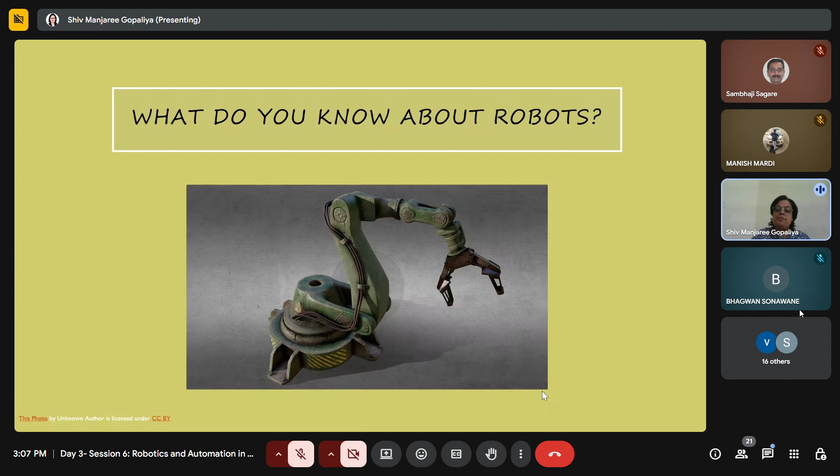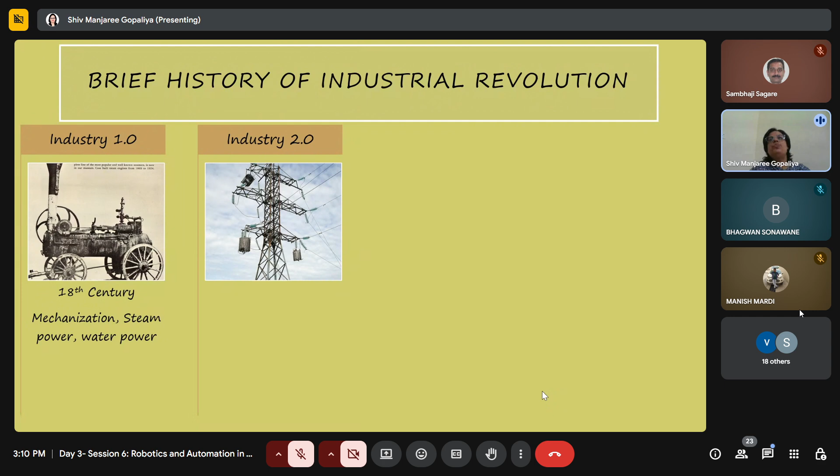And then Industry 2.0 happened, in the 19th century. It saw electricity generation, mass production. For the first time, factories were doing mass production. Textile industry was huge. Then we had the assembly lines also, and everything came up in the 19th century itself.

Industry 3.0 came up in the 20th century, where there were a lot of advancements in ICTs, electronics. Automation started in the 20th century itself, networking, networked production.

And here, before I proceed, I would like to say this, that it was early, somewhere in 1865, where for the first time Massachusetts Institute of Technology, the MIT that we say in present times, came into existence. Okay, and only 15 students were there, with 5 students per stream, and only core 3 streams were there in engineering: civil engineering, electrical engineering, and mechanical engineering.

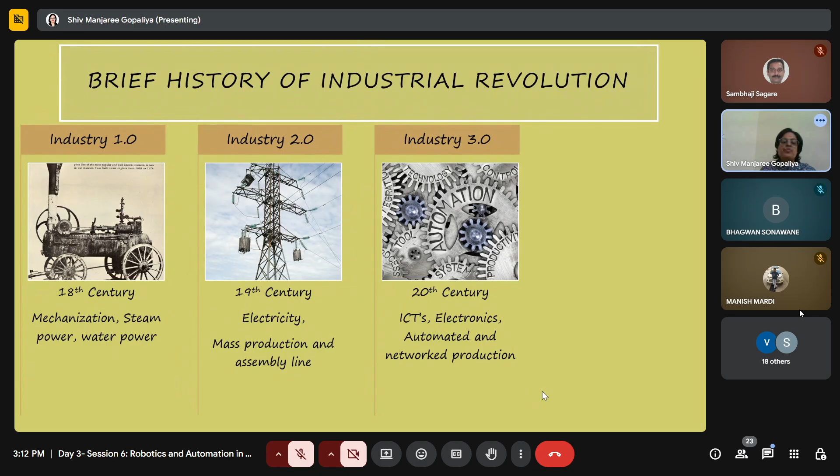So yes, and this is how everything started, right? 18th century, but in the 20th century we went on for automation and electronics and networking and everything, and then came Industry 4.0, that is today.

And what we are seeing today is, we have robotics, advanced robotics, 3D printing, that is additive manufacturing. Today morning you had a session in additive manufacturing also, I was going through the schedule. And then we have Internet of Things. Artificial intelligence is so huge these days. We have the big data. So all these form the Industry 4.0.

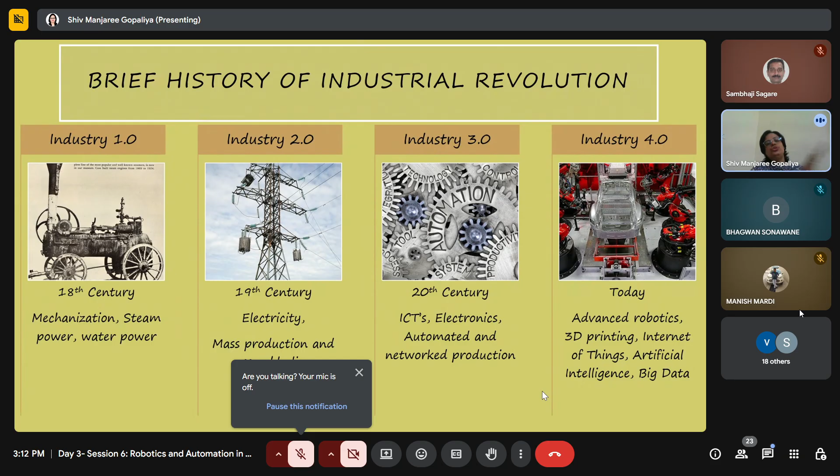But when I walk through this brief history of the Industrial Revolution, there is this pertinent question, what is Industry 4.0? It is the current trend of automation. Everything is like automation, whether we are having smart factories or smart homes or anything, it is automation. And when we say automation, the crucial fact is how we are using the latest technologies. So we need the technologies to be up to date, like cyber physical systems, Internet of Things, cloud computing, cognitive computing, everything.

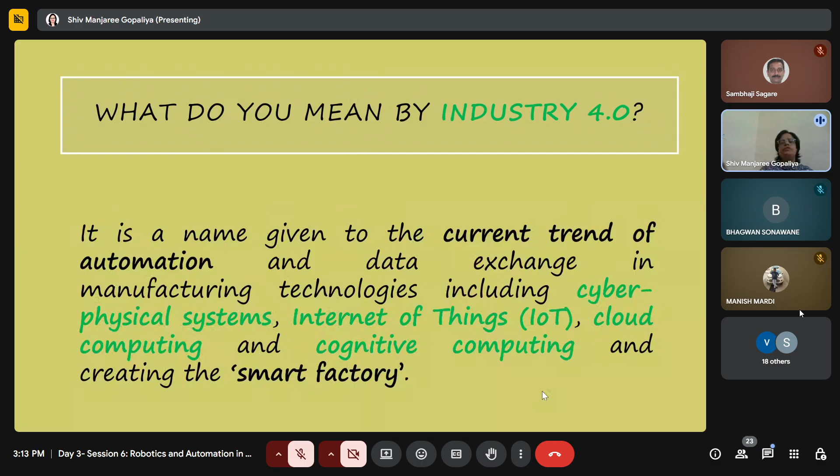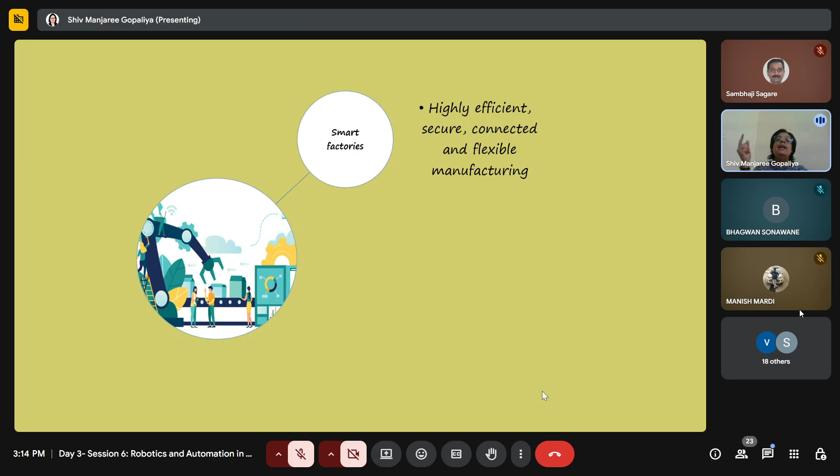And whatever we are trying to do, we are actually making a very robust, laborious factory into a smart factory just with the help of these technologies, and everything makes the Industry 4.0. Now Industry 4.0 has given us smart factories that are highly efficient, secure, connected. We get flexible manufacturing. We know in the present times what is the competition in the market. To survive in the market, the lead time should be so less, and everything comes up with flexibility when we talk about it in manufacturing senses.

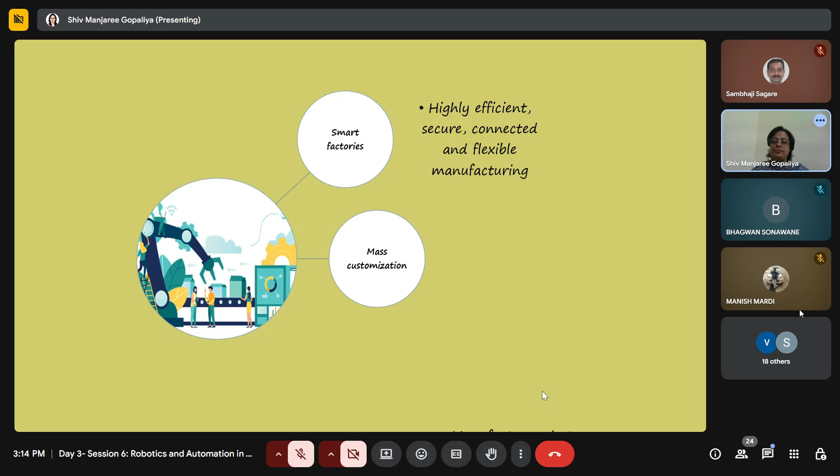Then mass customization, this is crucial - manufacture what the customer wants with low incurred cost. Okay, so low incurred cost.

And one thing more, in the least available time, you have to give it to the customers. And then definitely the technology. Industry 4.0 is made up of technology. When I say technology, it means interactive tools for customized products. And it is applicable not only for software but for hardware as well, and somewhere the hardware and software must work in unity, and only then it will help humankind. So this is very crucial.

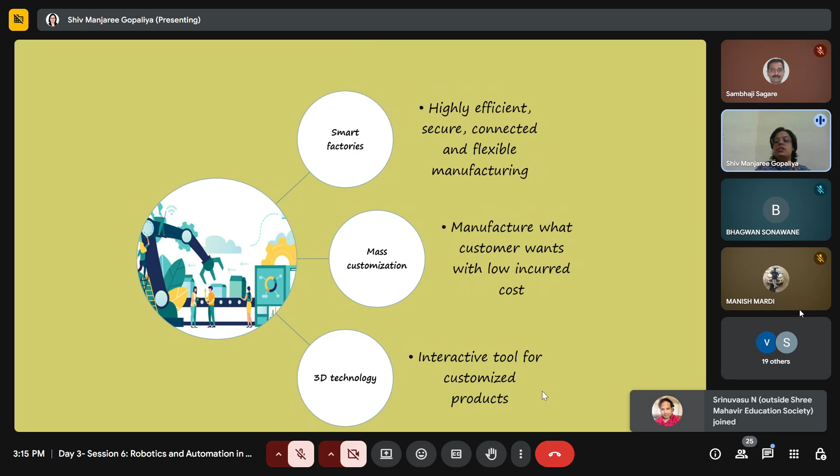Now, if I look into my last two slides, there is this question: what is common in industrial revolution? What is the common factor? If I look into the industrial revolution starting from Industry 3.0, Industry 4.0, and here I have taken the liberty to add one more term, that is Industry 5.0. I will be talking about this term a little later in the slides to come.

So if I see what is common in these industrial revolutions, the answer to me is a robot. Definitely it's a robot, from 3.0 itself, where automation started. Semi automation, automation - that level, that progress, we have actually started going towards the robots itself. And definitely we have the best robots like Sophia, the best humanoid robots present in the present times. So I hope you will agree that the common factor in the industrial revolution is a robot itself.

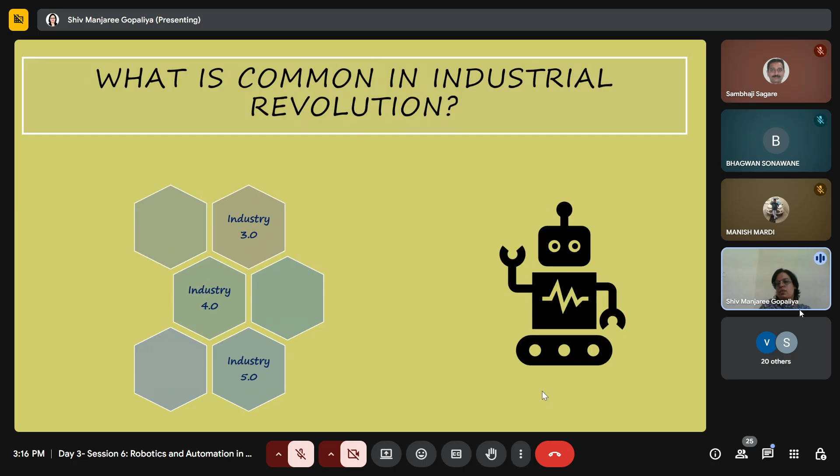Well, this is a separate task - how many of us, or how much of the younger generation is studying or learning about robotics, and how much they know how to work on the most advanced machine. That is a secondary question to answer, which will also come in my presentation in the slides to come. But this is very, very important, that the common factor is a robot itself.

And then the question arises, why robots? So before I move on to why robots, I would again take the liberty and ask you to please write just one application of a robot that is known to you. Any one application of a robot. So you have time.

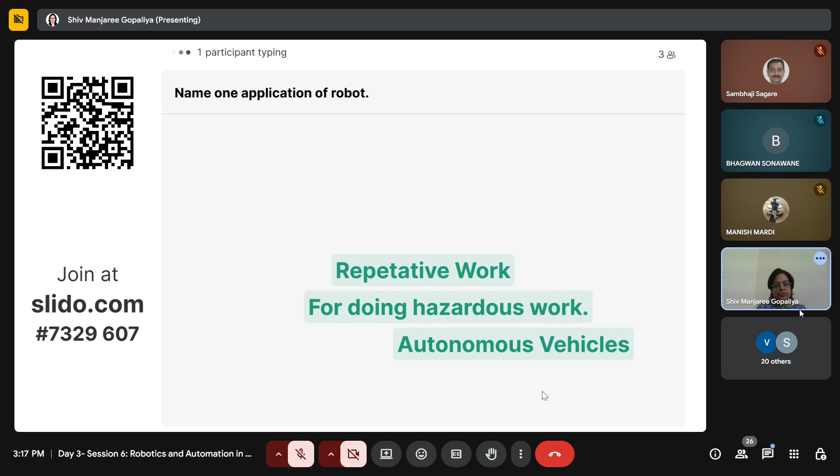Please answer to this. I hope participants are actively listening to the session. Name one application of robot. Autonomous vehicles, hazardous work. Repetitive work. Okay. Any other answer? Okay, so we have three participants who have answered this.

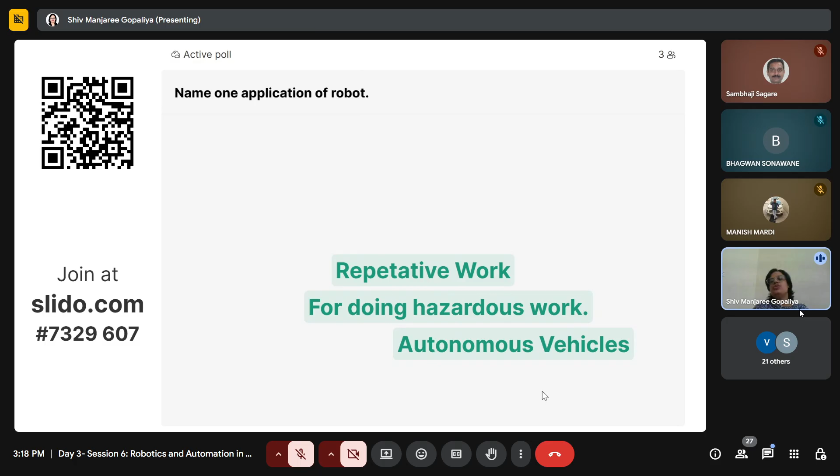Okay, I think I should proceed ahead. So what we see over here is one application of robot, and what everyone has tried to tell over here is which type of work we need a robot for. Whether it is a repetitive work or a hazardous environment, we want a robot in such conditions, or autonomous vehicles in that way. So let me tell you the robots that we have over here.

So we have the pick and place type of robot, the most elementary, even in educational robots - this was the very first type, pick and place robot. We have the loading, unloading robots, so that is the palletizing task that is done. Then we have the spray painting robots. We have welding robots - that is the application when we talk about palletizing, spray painting, welding, cutting.

Even in the present times, if you go to any factory and see a semi automated factory, you will find there will be one or two robots for the sole purpose of welding, cutting, grinding, or spray painting only. So one thing or the other, and we say it is a semi automated factory. Otherwise, we also have fully automated factories as well. We have the inspection robots.

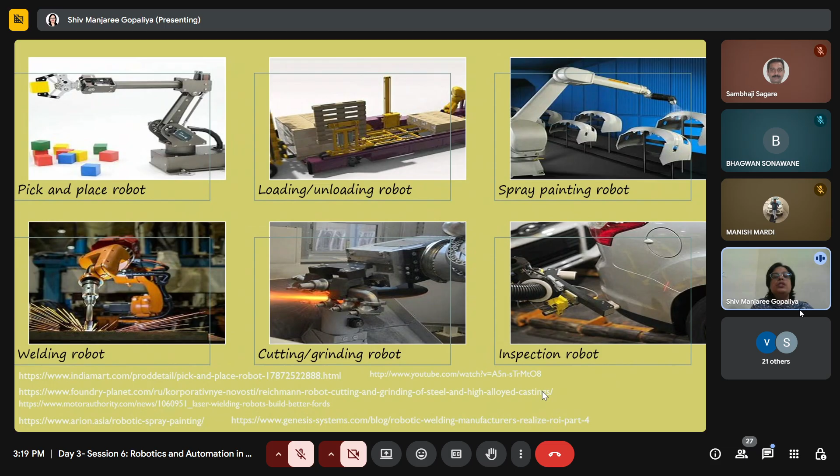So if I look into these applications of robots, what it turns up is we are actually doing smart manufacturing. These are all related to smart manufacturing. So we have smart manufacturing, whether it is semi smart or fully smart - that again is a question based upon the level of investment, that initial investment that goes into this.

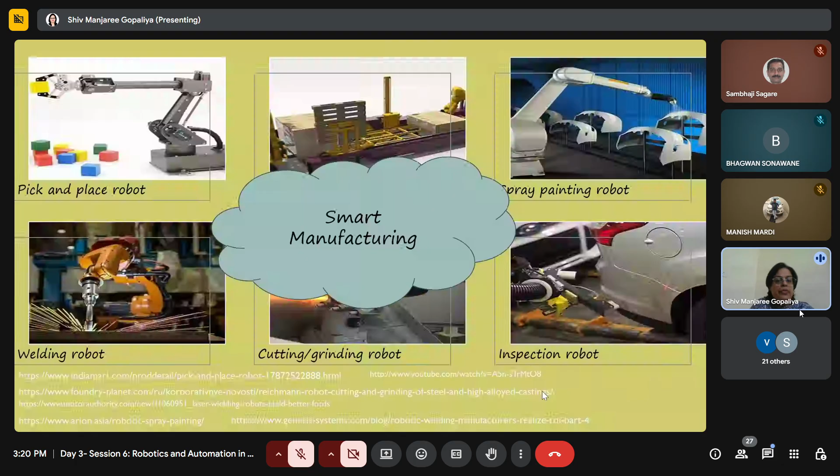Now the question arises, are robots limited to industries only? Anyone who would like to speak up, you can unmute yourself and say - are robots limited to industries only? Anyone? No answer? I hope I am audible to everyone. Yes?

Well, this is a boon and a bane in the online lecture also.

But let me proceed with, are robots limited to industries only? The answer is definitely no. Why has this happened? Because the application areas have changed drastically.

If you look into robots, we have industrial robots. My last slide talked about industrial robotic applications, whether welding, spray painting, grinding, or cutting. But then we also have surgical robots. These days invasive surgeries are performed with the help of robots and cobots. Collaborative robots are also there.

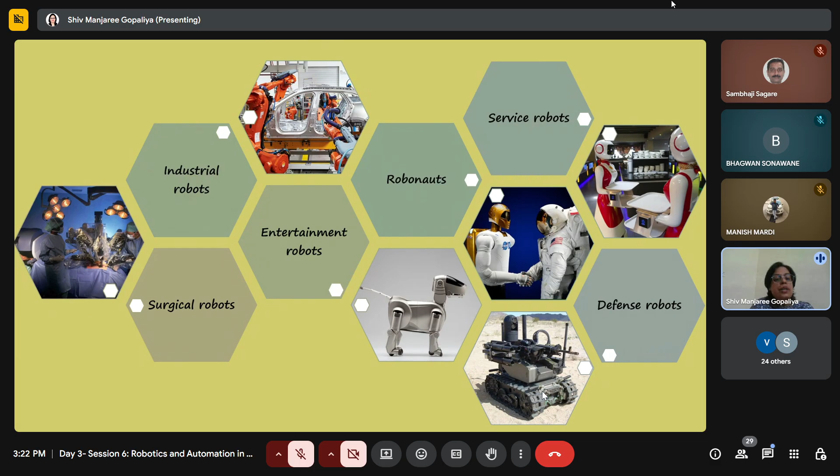Apart from this, the application of robots includes manipulators, arm-like structures. We have legged robots, wheeled robots, underwater robotics, and there are academics and universities where underwater robotics has taken a lot of strength. We also have aerial robots, the best example being the drones that we have.

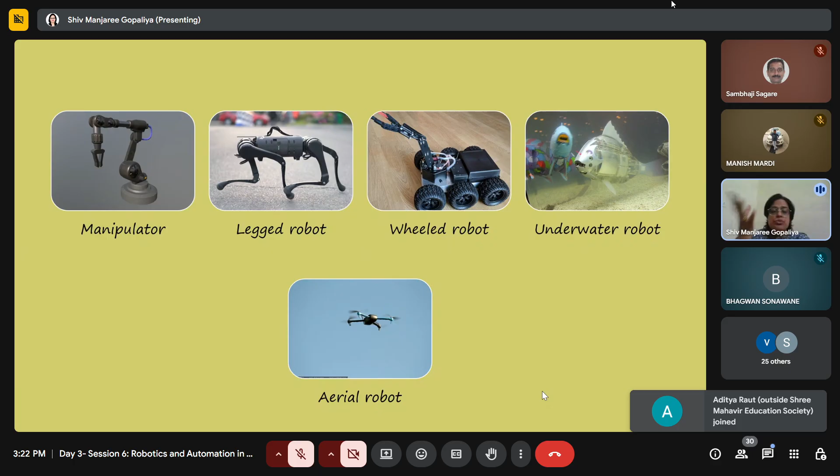Now, why are robots preferred? This can be best answered if we sit and analyze the pre-COVID times and the post-COVID times. In the pre-COVID times, the answer to 'name one application of robot' comes down to repetitive jobs, dangerous or hazardous jobs, or menial jobs.

The last one is Scrub Mate, a robot developed for scavenging purposes. Even in present times, in a few places, these robots are being used for scavenging. So this was the era of pre-COVID, and this was also one of the major reasons why robots were treated only for industrial purposes. As soon as the term robot comes up, one thinks it is only limited to industries. But that is not the scenario in the present time.

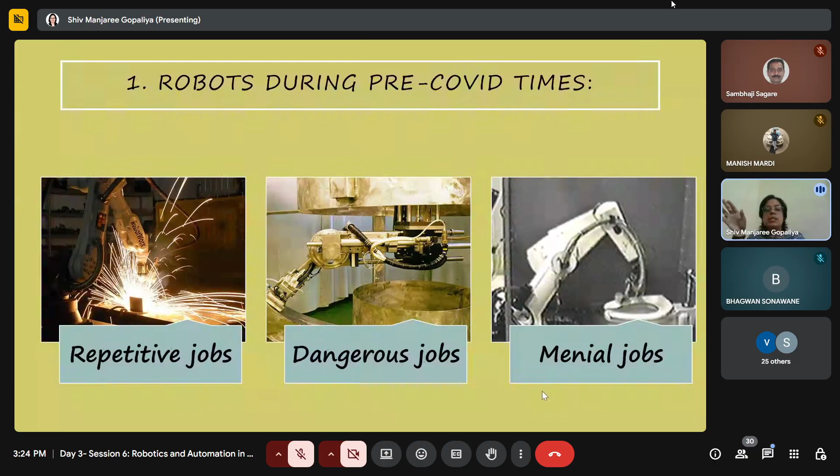So how has it changed? COVID was very harsh, very tough, that whole phase was very tough. But if we talk about technology, it has changed too.

During these tough times, there have been patient monitoring robots. We have delivery robots, because everyone was bound into isolation, so delivery robots, security robots, and definitely smart homes. These represent a level of automation, where robots are ready to listen to you and respond to you. So post-COVID, robots have moved beyond industries, they are not only limited to the industrial environment.

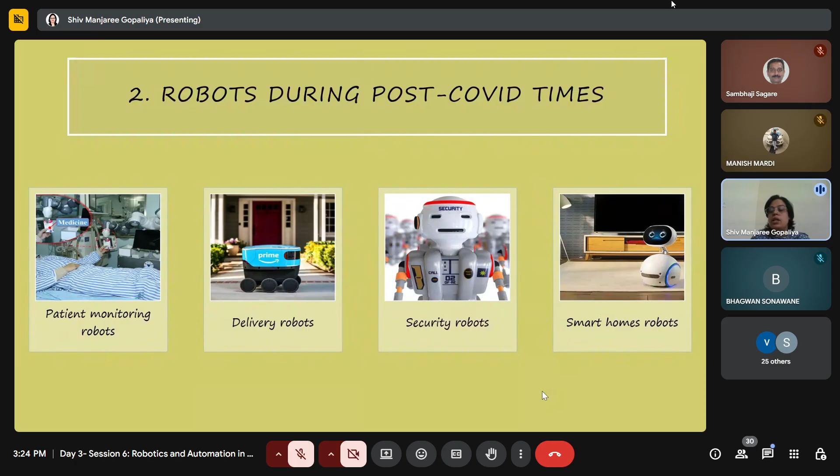There is this basic question: how is it even possible that in areas we weren't even thinking about, robots are now ready to be used? The way startups are coming up, the way the market is growing, in application areas we don't even think about on a daily basis, there might be a company growing where you find a robot serving humankind in some other possible way.

The question arises, how has this shift happened from the pre-COVID era to the post-COVID era? The answer is artificial intelligence. We know the drive that has happened in the younger generation towards AI. But as a mechanical engineer myself, I must tell you that AI is very, very strong, but when AI goes along with robots, the best machines, the scope goes beyond.

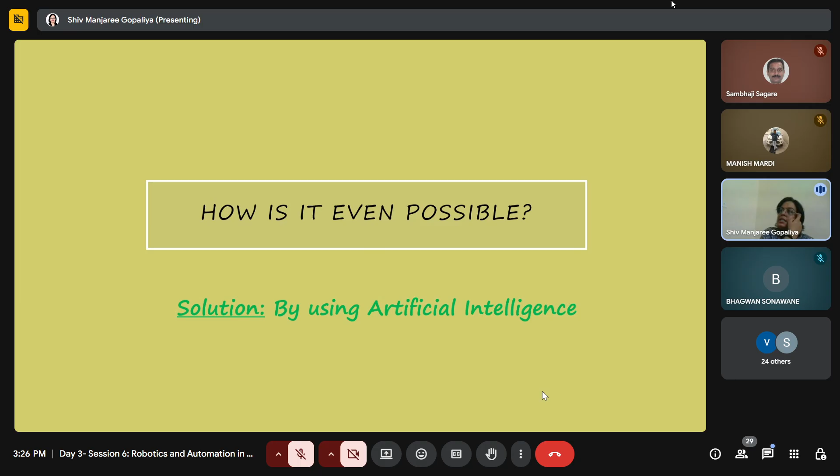So when you learn AI, let's learn AI with robotics, that gives the extra edge. Now, how has AI become integral to robots? AI is the brain, the artificial intelligence. We are trying to give thinking capabilities to machines, in layman terms. That is only possible when the machine starts thinking like humans, and humans think based upon their sensory perceptions, our five senses. So we should have visual perception, speech recognition, decision making, and language, if we are able to remove the language barrier as well.

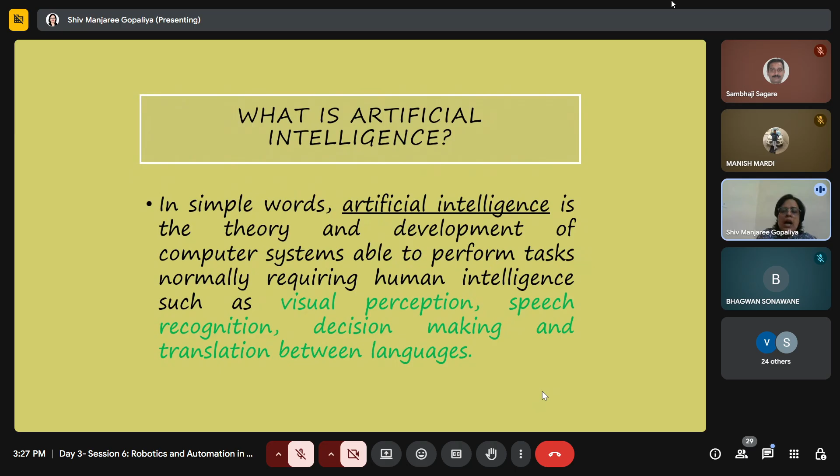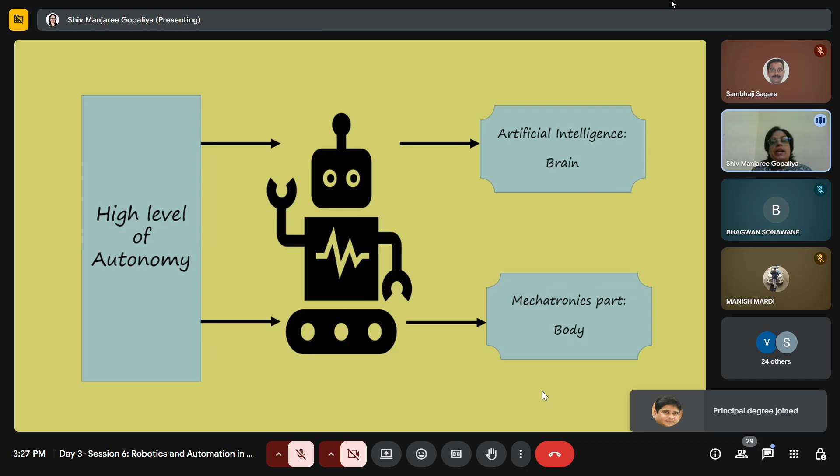So if mathematically, computationally, we are able to handle and develop such models, that is artificial intelligence. Now, the highest level of autonomy you can give to a robot comes through AI only, because AI works as the brain, but the body is definitely the mechatronics.

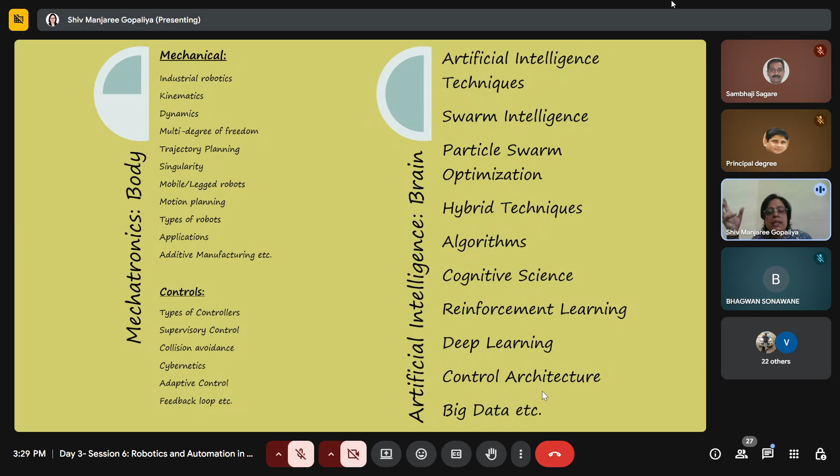And then there is this question of how robotics has performed in research. Research is so important. We are, after all, academicians, and it is on us that the fundamentals of this best machine should be taught in the right ways. But I will come to this particular question a little later in my slide.

I would rather move ahead with a little more toward the manufacturing systems in Industry 4.0. So if we look into Industry 4.0 in the present times, we talk about the sensors, the tools, the automation, the safety, the quality of the product. The industrial apps, everything is networked, and industrial IoT.

IoT is Internet of Things. I do remember when for the first time we heard this term, Internet of Things. And interestingly, you use it anything, and then we are using manufacturing systems. So IoT has a new name, that is Internet of Manufacturing Things.

And it actually helps us to bind the whole manufacturing arena into one place, that is the architecture, with real time traceability. So there are these thumb rules on the most important parts, like real time applications, adaptive controls, visibility. And unless anything is visible to us, we cannot relate to those technologies.

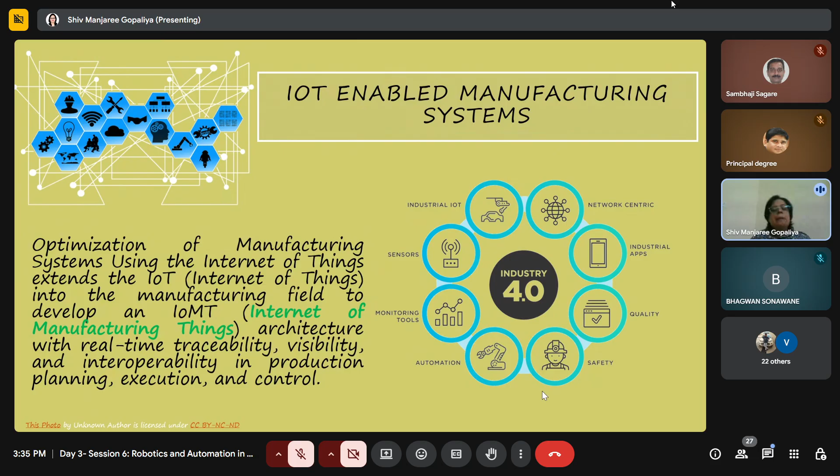So let's move ahead with this, and let me give you a little more insight into what I mean when I say Internet of Things into the manufacturing system. So we have this IoT-MS, and this is how your one factory layout will look like. If I go through the lowest step and rise onto the stair like this, we have the factories that are the manufacturing resources.

We apply all the IoT techniques, whether it is sensors connected, because that data, that terabytes of data, we cannot store it in a pen drive or a hard disk or something. So definitely all the data is being stored in the cloud. When I'm saying cloud, there was the picture of cloud computing.

When you say that all the major data is getting saved on the cloud, you know what happens?

There comes the picture of... please mute yourself. Please mute yourself.

So when the data goes onto the cloud, it is also very, very important to safeguard your own data. There comes the picture of cyber security, cyber crime and all those things. And then we have the smart stations, real time optimization. And this is the real picture of Indian factories when we are sitting in the Industry 4.0 era right now. This is how the whole factory is behaving, is working in the smart environment.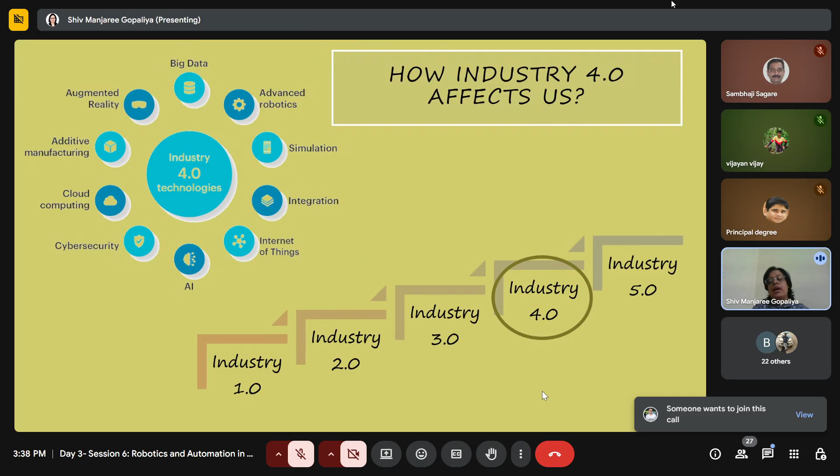And it is not just anything, it is a machine. So machine, along with all these technologies, will only help us to move ahead in the time to come. And then if I go through this ladder from Industry 1.0 till Industry 4.0, let me go to Industry 5.0 also. So before that, Industry 4.0, moving on to Industry 5.0.

So we are sitting in 21st century India in Industry 4.0. And I must tell you that the developed countries are already working towards Industry 5.0. So 5.0 is the place where the work is going alongside the robots and the smart machines. Because you see, unfortunately, this is also the era where we have seen a lot of unemployment.

This is how the debates come up when the term robots is put up, and it has come up with the unemployment angle. But I would rather say reskilling and upskilling labor. It has also made the point very relevant that humans must work alongside machines.

This is the research shift, this is the industrial shift that is going on for at least more than a decade now in the developed countries, where humans and robots can work together, and this is called Industry 5.0.

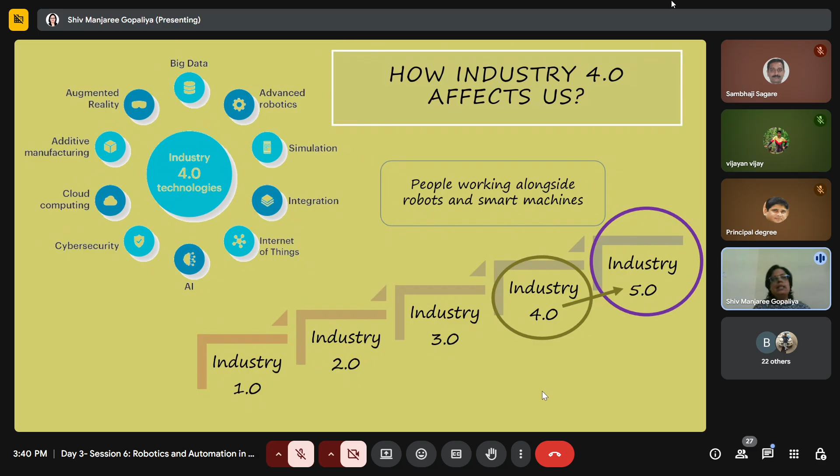So the younger generations, when they graduate and move towards their postgraduation, their PhDs and everything, Industry 5.0 will be more relevant, more futuristic when we are talking about it. And how is this possible?

Because robots are helping humans to work in a better way, in a faster way, with the best technologies. So yes, we have to reskill ourselves with the best technologies available in the market in the present times. We have to keep ourselves up to date.

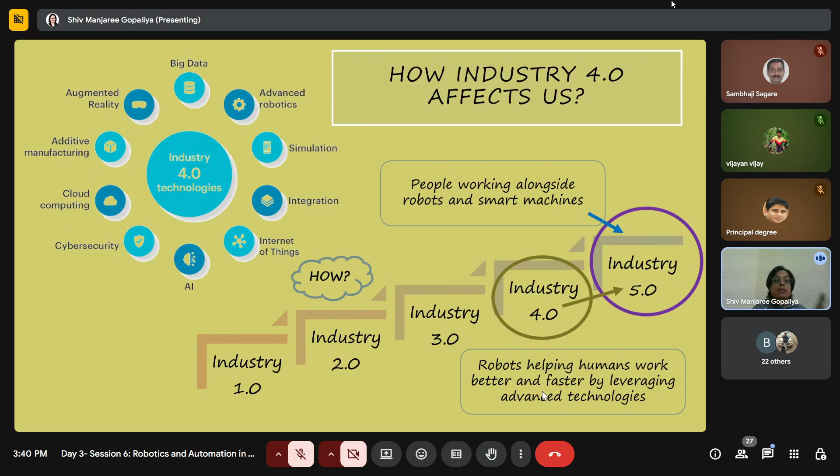At the same time, we have to utilize the potential of the robot as well as the human. We cannot simply replace both. So somewhere we have to put that optimization of a machine and a human to work together, and this is Industry 5.0 when I'm talking about.

And when I say so, it is not possible if you do not talk about sustainability. So then the question arises, what is sustainability as a concept, as an approach?

The concept is very simple. Sustainability in present times, in academics also, a lot of effort is being put up, even by the government and by the universities, to put up sustainability and make the younger generations know what sustainability is all about. So yes, somewhere we have already hurt the ecosystem, the environment, and this is the right time.

To create the right balance between the environment, the society, and definitely the money, the economics. And when we are able to make these three balanced, the output will be the most sustainable one. So this is the concept, this is the fundamental.

And then in order to achieve it, we have the sustainable development goals given by the United Nations. So we have this, and there are industries working in this direction. There are so many, whether academics or industries or startups or individuals, they are working in such engagements so that the products go sustainable.

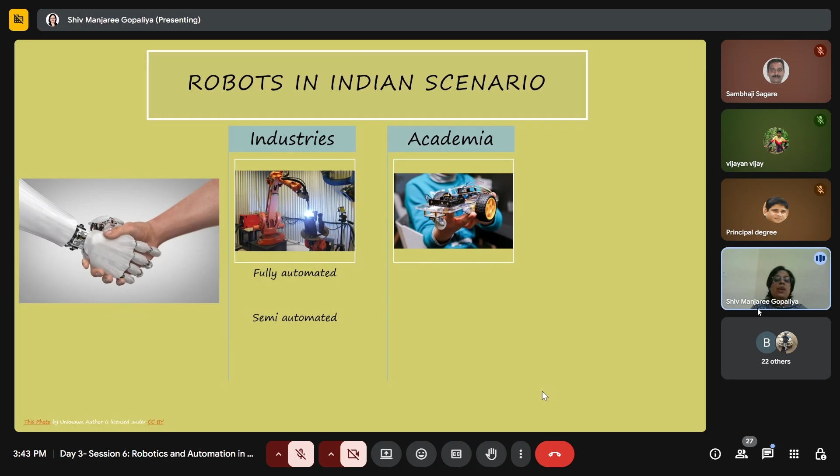Universities of national importance, private universities - I belong to VIT Bhopal University. We have programs like robotics and artificial intelligence.

This is also important for us, that when we are making our younger generations tech savvy and industry ready, it is also very important that they learn the latest requirements of the industries. We have colleges, schools have taken this responsibility, and they also have very wonderful robot labs if you go to the schools. So academia has also taken up the importance of robots, and the Indian scenario is changing.

And definitely the startups, the younger brains, the younger minds, they are so sharp, they are ready to dream and believe in their dreams. And we have the startups, so upscale growth to become the full-fledged industries. And then there are economic supports also, and definitely from small startups to the big dreams. So this is the whole scenario presently, how it is working, and the progress is good if we look into it.

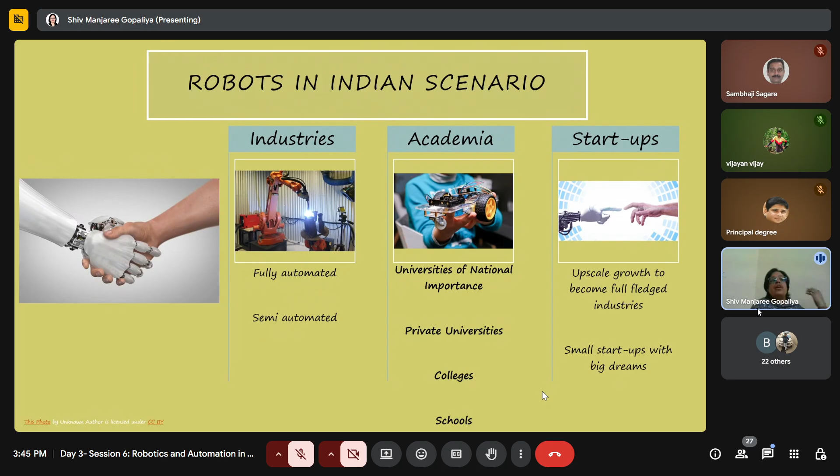Yet a lot of work needs to be done when we say robotics and artificial intelligence. So there are many areas to explore and work together.

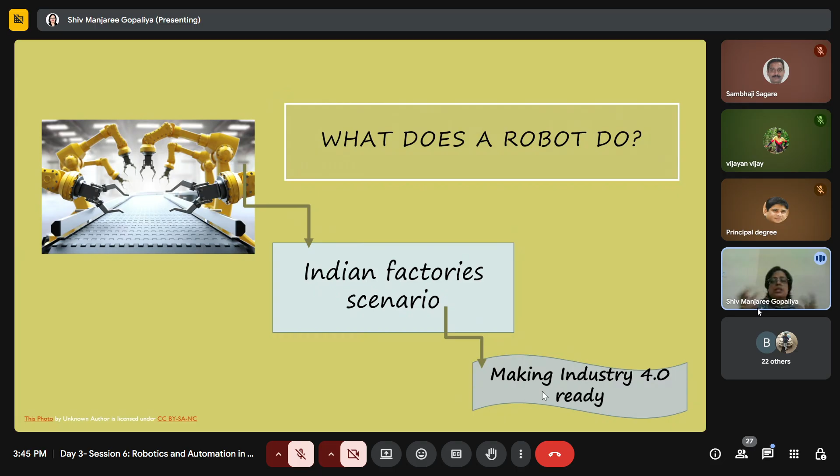Now the question arises, what does a robot do as far as Indian factories are concerned? Definitely industry 4.0 is already there. I have already told you about what industry 4.0 is. But then the question arises, what will be the future? Well, industries are already there with robots, and robots are coming up with their brain, that is AI. So the future depends upon the size of robots, and this is the crucial factor which has come up post COVID times. The size of robot has changed.

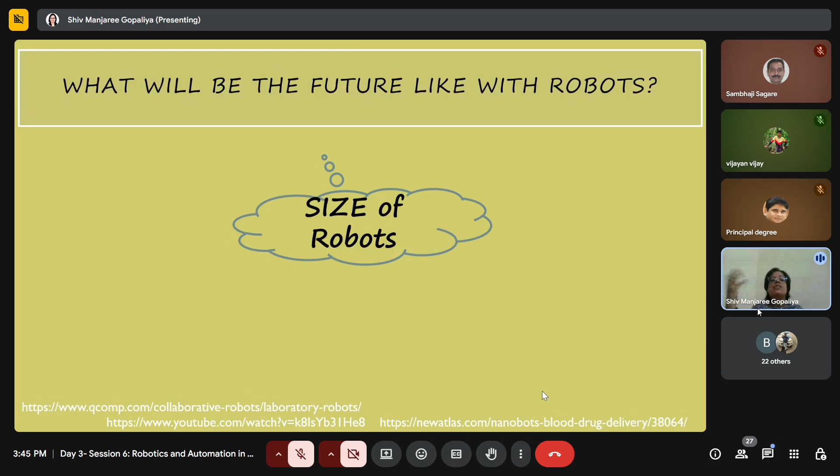Now when I say the size of robots has changed, we have these collaborative robots. There is one body only, but with two hands. It is like a human standing on a platform, doing a task in tandem, in unity. So that is important. We have the collaborative robots, and you see the whole shape, size, picture, everything of the robot has changed.

Then we have micro robots and nano robots. Robots these days are infused into the bloodstream also, and then they do invasive surgeries. And this is how robotics have progressed.

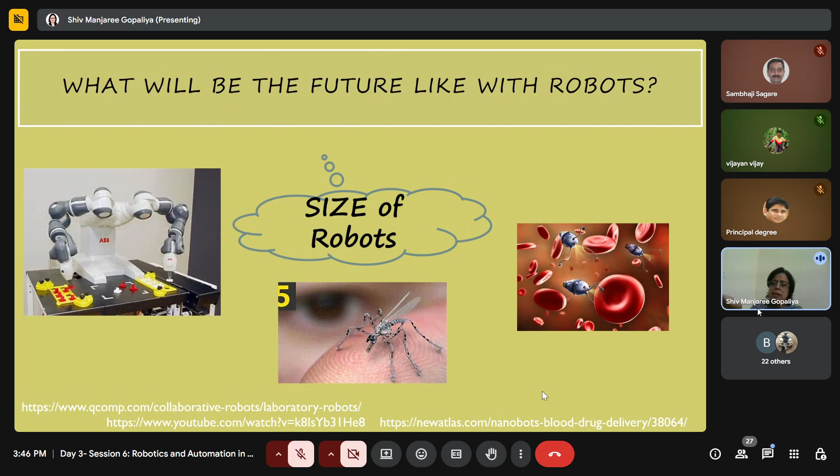So healthcare industries, automotive industries, 99% of the sensors are used in automotive industries. And one thing that goes behind automotive industries is the MEMS industry, that is the micro electromechanical systems industries, where micro level sensors and nano level sensors are there. Defense sectors, where bugs are created for surveillance. So the futuristic approach goes into size of robots also.

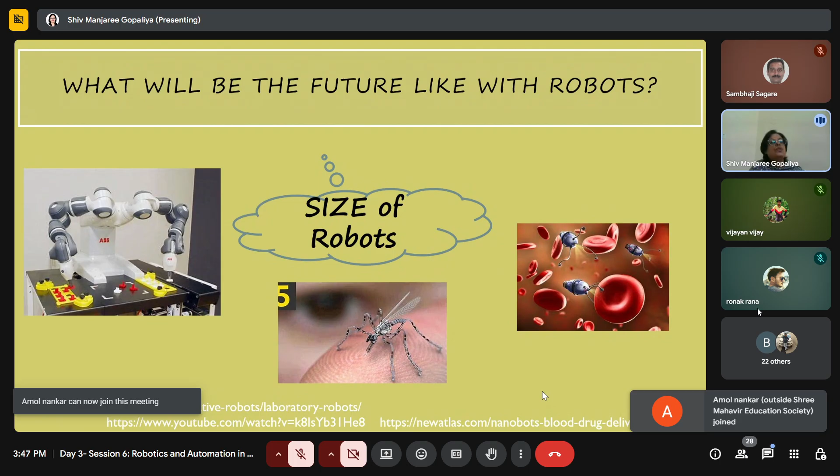However, mechanically speaking, the kinematics, dynamics, controls will always be there. But the size of robots will vary, is varying, will vary, and how our younger generations are going to learn and cope up with this is very important. So we have to train them in these directions.

And when I talk about making industry 4.0 ready for our younger generations, we also need to acknowledge the most important part, the needs and the challenges. Robotics is just not a course, so how do we move ahead? The challenges are the market challenges, the human-robo interaction, which is also a part of industry 5.0, and a common machine language.

Because we know that every 6 months the softwares also keep changing, keep updating. And improved cyber security, because all your data is there in the cyberspace. So yes, we have to go with the cyber security.

However, with these challenges, the Indian industries are working really great, but then also remains the needs of the Indian industries. And we have seen the gradual progression from semi automation to full automation, making the factories smart factories. And we need robotics engineers. So as academicians, it is very important that we look into the importance of multidisciplinary engineers.

We keep saying that when industries come for placements or something, they do look for interdisciplinary engineers. And this is important, qualified multidisciplinary engineers. Here I will take the liberty to say robotics engineers, because along with all the streams, you need to know your machine also. So it is good if you are progressing towards robotics, the need of the hour.

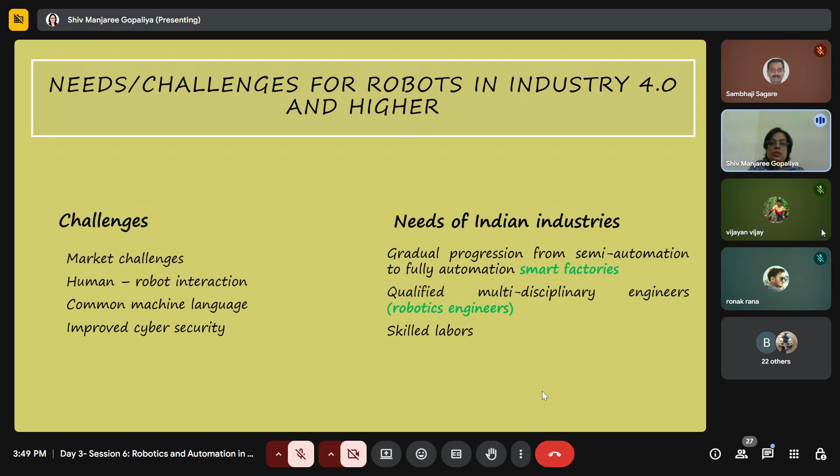And definitely the skilled labors. We need to reskill ourselves, and we need the skilled labors.

Now, future of robotics, if I talk about the factories that will come up, will mostly be autonomous, be fully robotic based. And you see how the inspections have changed, the smart mechanical systems. So everywhere, we have an Alexa at home. You see, you speak, you talk, and you work. So everything is there, voice recognition. We talk to our TV screens, we talk to our laptops, we talk to Alexa. So the factories of the future...

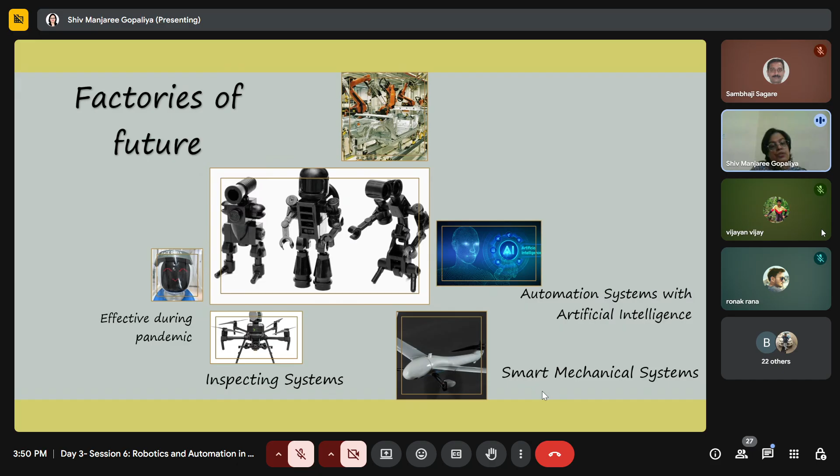40 years ago, whatever was there, gradual progression is there. And interestingly, our society is ready to take all the changes. We are ready to adapt to all the changes also. So this is how the factories of future are going to look like.

So here I would like to conclude, but before concluding, let me go back to my very initial question which I left earlier, that how it has progressed as far as research work is concerned. So my research has progressed since 2005, 20 years. A lot of my domains have also changed.

So I'll keep talking about this, but you know, about my research, you have the pick and place robot, you have this, which is more like a surgical robot. And I have worked on the kinematics, dynamics, software tool development. So if you are a researcher looking into this, you go with the development phase.

Development is more important when we are talking about this. Yes, experimental validation is important—we are mechanical people, we know how much experimental validation matters. My students, when they come and say they have made some software, my very first question is whether your software will work with my machine, because finally I have to develop and manufacture a product. So whether the software is reliant with the machine, whether that collaboration is possible, is very important for younger students to learn and do.

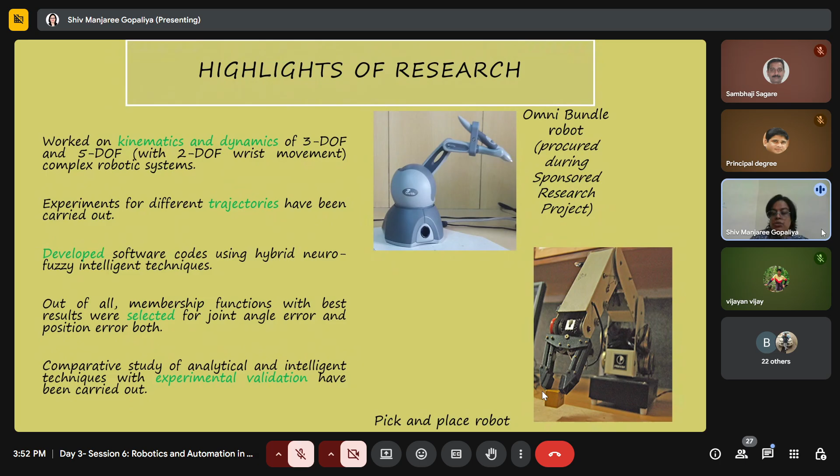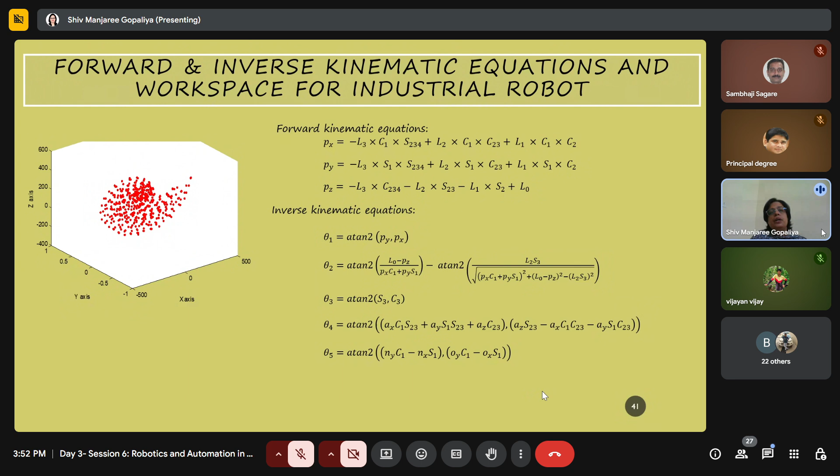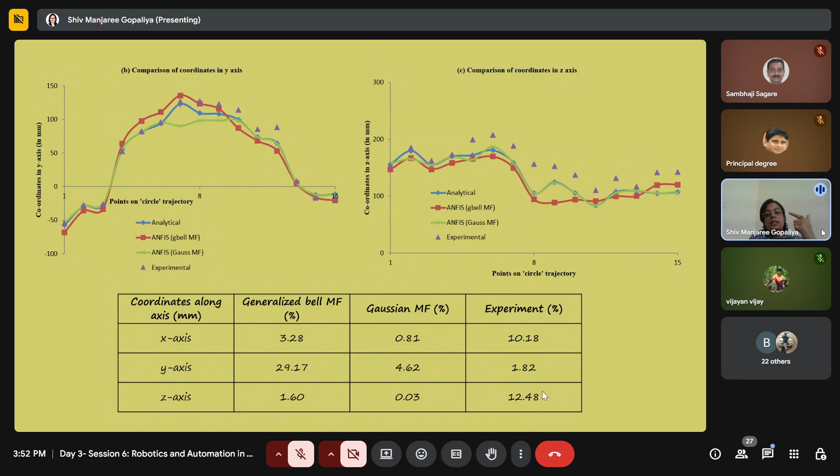Trajectory planning is just part of kinematic modeling—how it is done, the details. When I say kinematic, we have forward and inverse kinematics, and trajectory planning. If I give a trajectory, how is this going to work? Look into how much error there is, how much error is acceptable, and whether the results procured can actually be put into industry or not. And then dynamic modeling is also important.

If you look into my research for the last 20 years, my students have also worked in directions like sustainability, energy saving, rehabilitation robots, and prediction analysis. You can even visit my Google Scholar page and look into the type of work that me and my students have been carrying out over the years. This is very important to make yourself Industry 5.0 relevant also.

I hope people are there. Let's start.